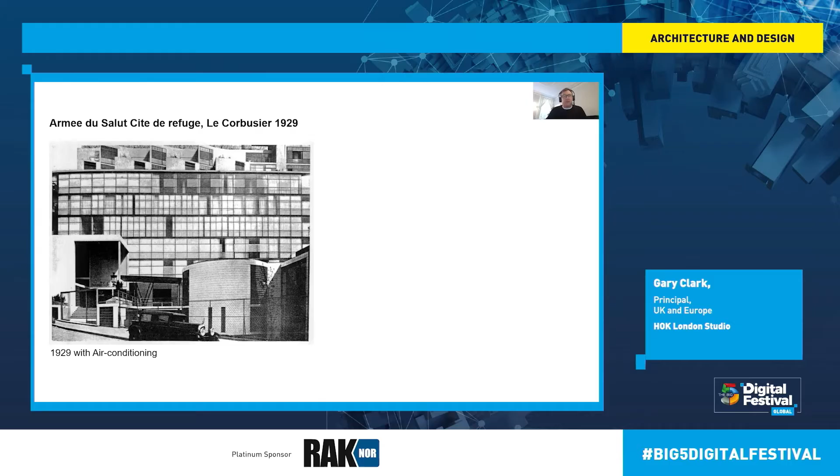of air conditioning. However, over the years, the organization that ran this couldn't afford their heating and cooling bills, like electricity. It was too hot in summer and too cold in winter. And effectively, they had to redo this building. So they invited Corbusier back in 1952 to do a retrofit. This is probably the first sustainable retrofit.

And what he did is he created a naturally ventilated approach, mixed mode. You can see here external shading devices, and again, it was all tuned to the orientation of the building. And this helped the building to mitigate its environmental conditions with a sensible reliance on electricity and air conditioning. So that lesson, I don't think, has actually been learnt by our profession.

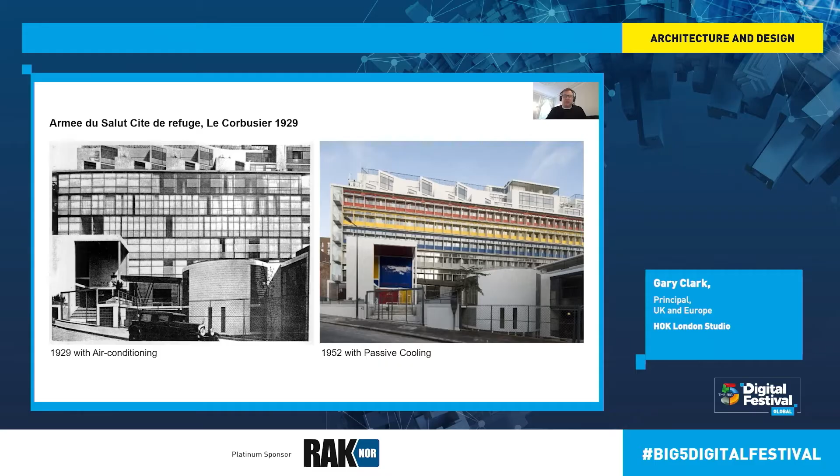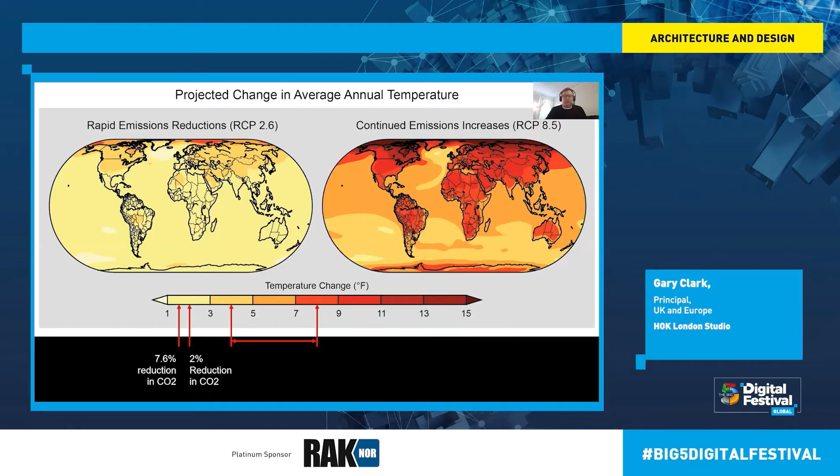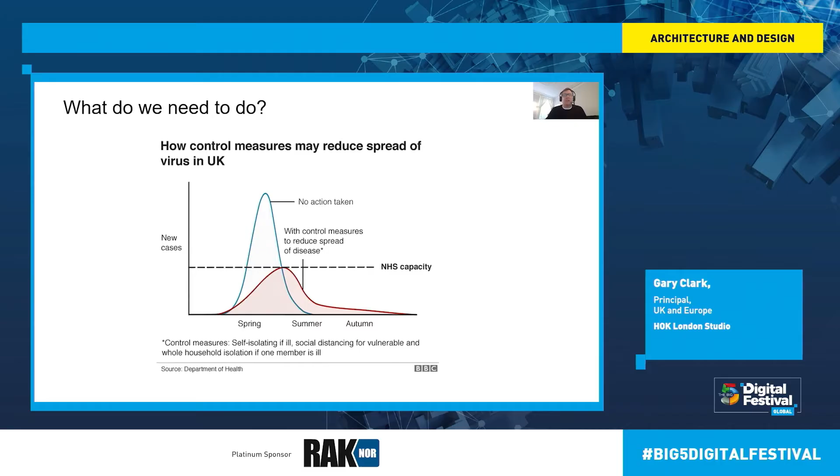And the same principles really match with climate change. If we take no action, then we're going to burst through Earth's capacity, and I would believe that we're actually beyond that now in terms of the cycle. And we've got to work hard to reduce carbon emissions, flatten the curve underneath Earth's capacity to absorb. What we do in the next 10 years is absolutely critical. We can see that in the graph.

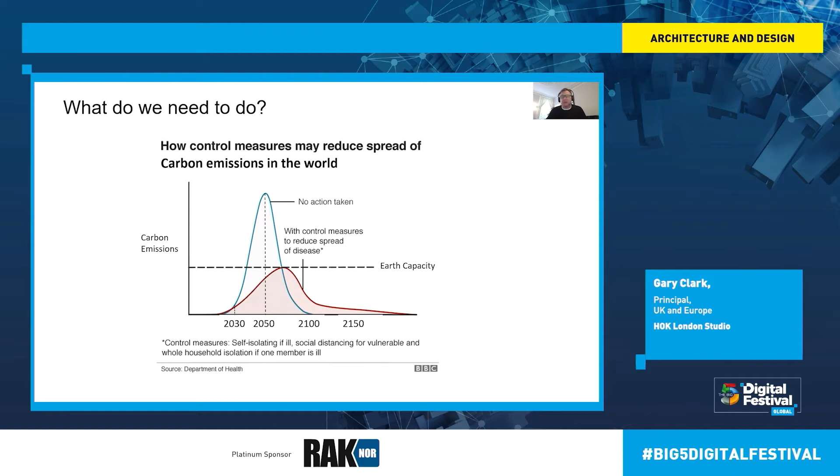I've been very privileged to chair the RIBA Sustainable Futures Group for the last couple of years, and in that time we've rewritten all the core guidance of sustainability for the RIBA. So I'm going to touch on these guides. First one is the RIBA Sustainable Outcomes Guide, then moving into the RIBA 2030 Climate Challenge, and then how that's all embedded into the new Plan of Work 2020.

All the guides link back to the UN Sustainable Development Goals, all 17, but what we focused on is 10 which we think we can measure and manage on site at project level. It's for busy design teams and architects that we need to have ready reckoning metrics to match that, and we can manage that within a project level. These all come down to 8 sustainable outcomes.

So just very quickly, top is operational energy measured in kilowatt hours. Then we've got embodied carbon, which is kilograms CO2, together their whole life carbon. We then look at sustainable water cycle, and that's litres per person per day. Sustainable connectivity and transport, and again, it's reducing the reliance on commuting, and obviously all this remote presentation is actually working well. Then we've got sustainable land use and ecology.

What we ask is design teams in the UK to leave a site with more biodiversity than when they get it, and 10% minimum net gain, if not 20%. Good health and well-being, which we'll touch on in a minute. Sustainable communities and social value, recognizing that what we do has significant value beyond just the bricks and mortar. We've got to think about the wider community benefits. And then finally, we've got to look at the whole sustainable life cycle cost.

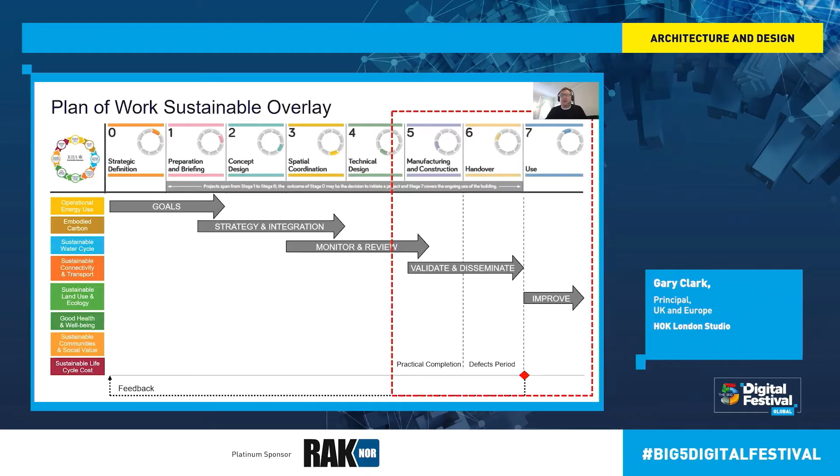So what we're saying is part of this is a graduated post-occupancy evaluation. At the end of 12 months defects, we ask for a light touch review, and that's a walk around and so forth, user survey. If something's not quite right and you think there's further fine tuning, this would be a separate contract. You could go back in at year 2 with your engineers and architects together with the users, and do a little bit more research in terms of what's happening within the building. And then finally, a detailed forensic investigation in year 3. So this is a classic 3-year detailed post-occupancy evaluation. But we've got to close the feedback loop. This is how we've got to do this going forward.

The 2030 challenge has really set a fairly stringent goal. If we do nothing, we can see on the top there, it's going to be +4 degrees. The government in the UK have set a legally binding target of 2050. We can see that on the bottom scale. And then I've been gradually plotting on the different governments and bodies and how they're actually tracking through when they're going to hit net zero.

For the RIBA, we've set 2030 as that target just now, and basically what we're saying is any new building or deep retrofit project has got to be net zero by the end of 2030. If you can go faster, then really encourage everybody to do that.

And the reason for that is we've got to really deal with the elephant in the room, which is the existing building stock. We've got 27 million homes and total 45 million existing buildings in the UK. Most of them are actually underperforming and adding to our 40% of our carbon emissions. So we've got to have a planned retrofit for the entire existing building estate in the UK. And obviously we've got 30 years to do that.

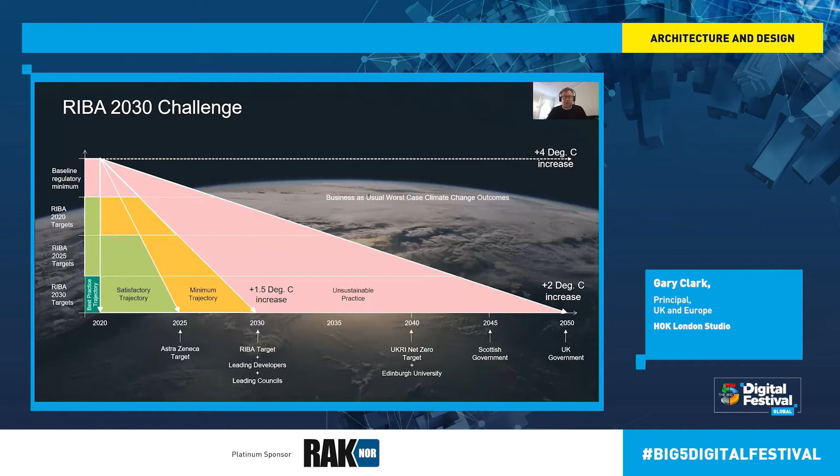So RIBA and lots of leading developers are signing up to this 2030, which is absolutely fantastic. Leading councils as well. Many have declared an emergency and set 2030 as their target. Interestingly, a big global business there, AstraZeneca, has said that they're going to be net zero by 2025 for their entire global operations. And that's the way it's going. So really, if you're at the leading edge of this and you want to be leading in terms of the construction sector, then that's the plan.

Now, if you're in different countries, you can actually use your benchmarks from your own country, and then you just apply that same principle. Now, the principle really is trying to get that 75%. That aligns with the AIA 2030 commitment. And what we're saying really is the challenge is trying to do the bulk of the carbon reduction by the envelope and the building on site itself before you're allowed to offset using decarbonised renewables or planting forests. We think that's kind of a fair balance.

Embodied carbon, slightly different metrics there. We see that's 1,000 kilograms for the average house back in the day, but really new housing is about 600. So we've asked for a 50% reduction on that by 2030. Potable water use in the UK is still an issue, obviously in the south of England, and 125 litres per person is the current benchmark, and we're asking for a 40% reduction. Now that would include rainwater harvesting and reuse, so we'll come back to that in a minute.

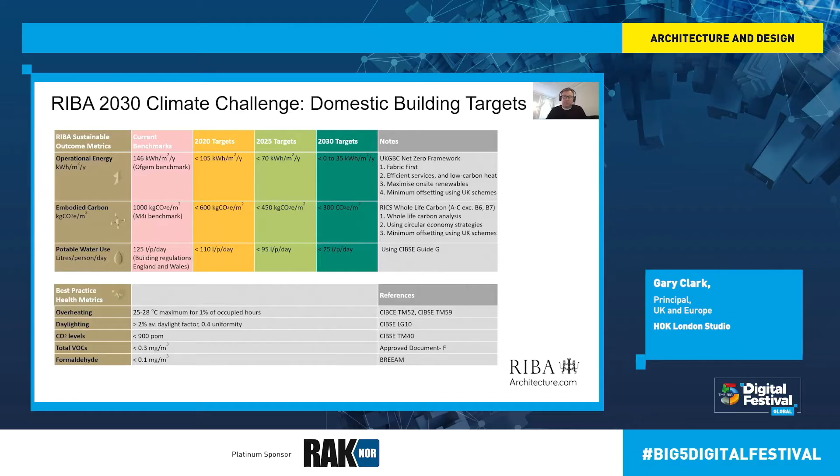And no matter what you do, we've got to hit good health and well-being metrics, and that's indoor air quality, temperature and also daylighting, and that is absolutely critical in a post-COVID world. These are slightly different ones for non-domestic, different benchmarks, but broadly the same principles again in terms of percentage reduction. So the magic number is a DEC rating in the UK, which is a display energy certificate.

It's operational energy, so this is everything in the building, and we're looking at a target of 55 kilowatt hours per square metre, which is really challenging, we know that. Embodied carbon 50% overall. Water use, you can see again 40% reduction, and the health metrics are the same.

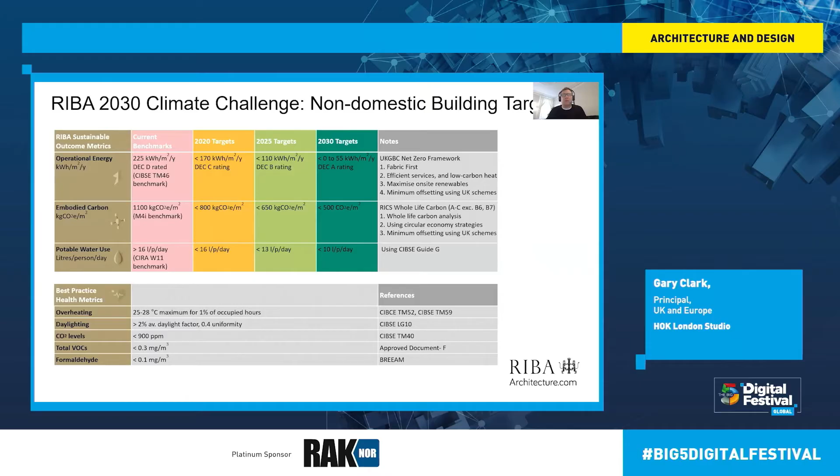So where does that come in terms of current benchmarks? Now this is CIBSE in the UK, kindly gave me this slide, and we see there the blue angled line is really the profile of non-domestic government offices, and we can see some are actually quite low and some are high.

So there's a kind of spread coming from about 100 kilowatt hours up to 400 kilowatt hours per square metre. The average really CIBSE have estimated is 225 kilowatt hours per square metre. That's our benchmark. And we can see coming down there to the right hand side, we've got 2025 targets, which is 50% reduction, and then the 75% in terms of 2030. And we align with LETI and UKGBC as well.

So the red line at the bottom, that 55 kilowatt hours is our target in the UK. That target obviously will be different in different countries, but that's really where we need to be. And there's one building that has actually hit that consistently in terms of it's close to it, but if it had a heat pump, then it would consistently hit that. So we'll come on to that in a minute.

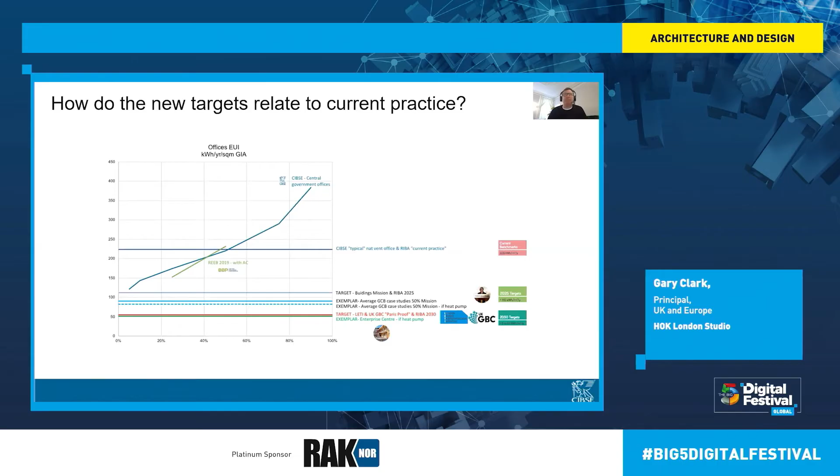So picking up the different key metrics or key outcomes. Net zero operational carbon: there's no shortage of energy hitting the planet. The sun provides 1 kilowatt per square metre for half the planet a day. The problem is trying to capture it and store it. So what we do in terms of the principles is first thing is we've got to retrofit first. So in the UK, we've got to look at our existing building stock, and we've got to do that before we actually build new buildings.

First principle, really after that, if you've got to build new, is a fabric first approach. And what I mean is really looking to really increase the U values, air tightness and so forth of the fabric of the building. That's where the bulk of the savings will come from. Then when you do that, then you think about regenerative engineering in terms of thermal recovery, ground source heat pumps or air source heat pumps, and then smart controls in terms of shutting off when nobody's in the building or in the room and so forth.

Then we're looking about how we integrate on-site renewables. PV obviously is an obvious choice there, and then before you then offset with off-site renewables to achieve your net zero.

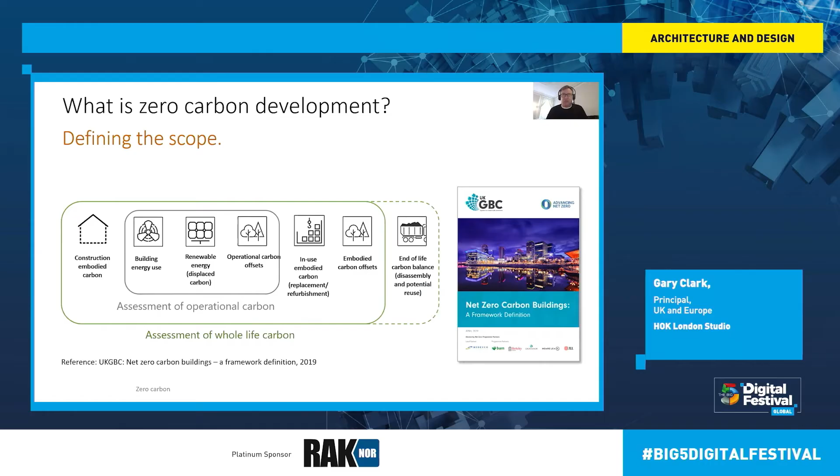So all our targets and all the guides link together with the UKGBC and LETI. We work closely in the background to make sure that we align in terms of definitions, metrics and targets. So just absolutely clear about definitions. This is the definition we're using from the UKGBC for net zero carbon. It's about the operational carbon in the grey in the middle. It's building energy use minus renewables, and you've got to offset. And then the whole life carbon is adding construction and the in-use embodied carbon of replacement and maintenance. And that's where you get the whole life building carbon.

Breaking that down, we can see the splits in the UK. On one side, we can see how it's all related in terms of embodied carbon. To the left side, the majority of that is in the sub and superstructure. So structural engineers are absolutely critical to achieve this. And on the other side, we can see the range of in-use operational breakdown. Heating and cooling is one of the key ones, especially in the domestic situation in the UK. But the unregulated energy use is absolutely critical. You can see there 45%, and that's for an average office. That is where the future really needs to look at reducing that down.

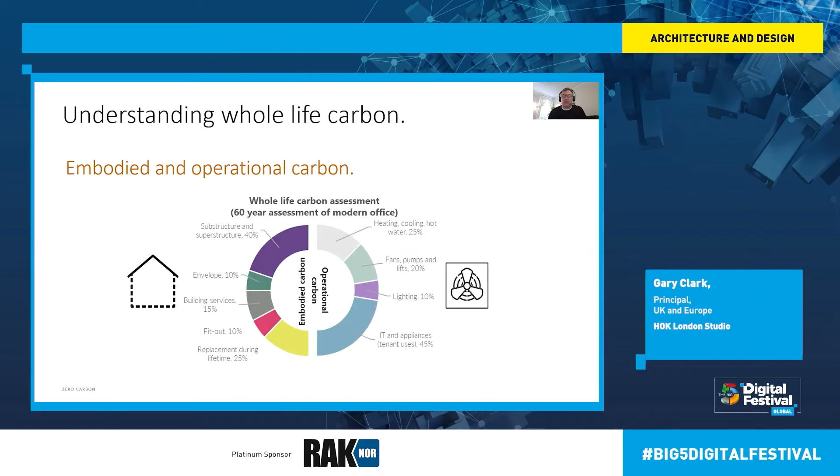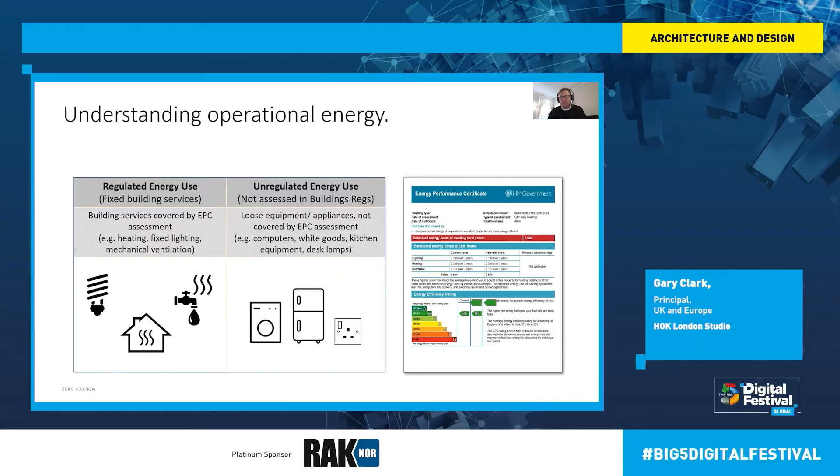Going into the split there, we can see regulated and unregulated energy use. What we're saying in the UK is to ditch our current energy performance certificate, we can see on the right there, and we need to move to a display energy certificate, which includes regulated and unregulated energy use in buildings. There's a few tools that we can use to do that, ranging from poor accuracy to good accuracy. And what we're advising, lobbying for, is to ditch the current regulations and move to a design for performance tool, and we see there Passive House is that borderline. Passive House is one method where we can do an alternate route, with a very good track record of achieving those targets.

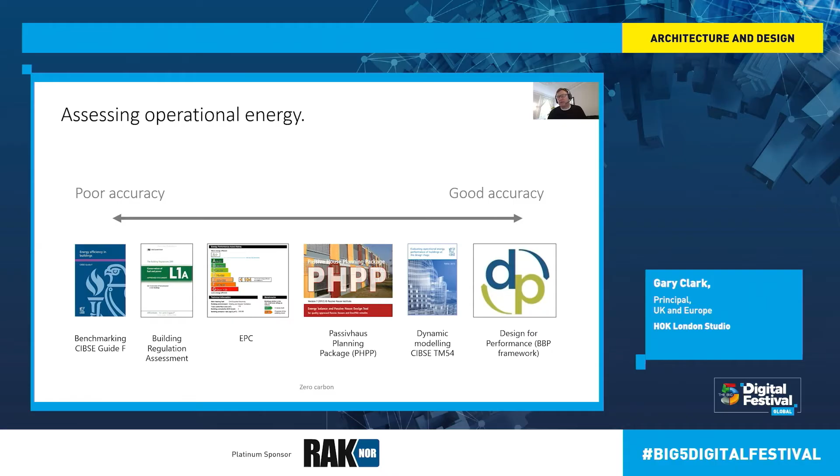Going into non-domestic buildings, we've got the CIBSE TM54 tool, which is really good, and then coming out of Australia, there's a new design for performance tool, which the Better Buildings Partnership are developing, and they use the benchmarks to then set that target.

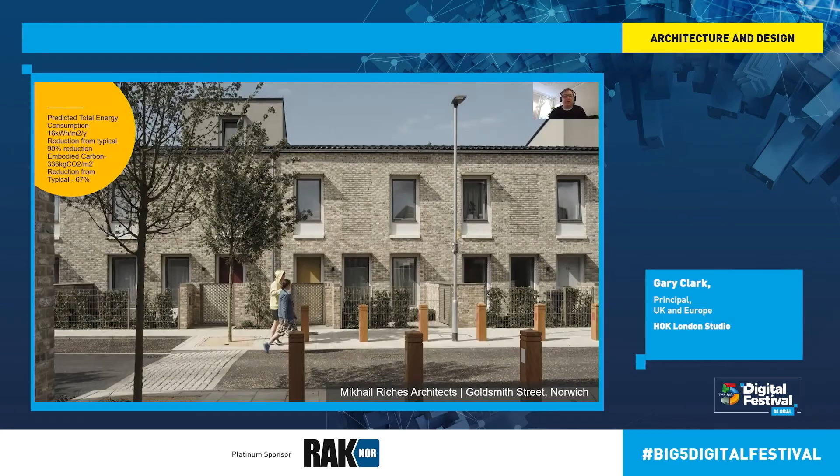This is Mikhail Riches, and I was lucky to be a judge last year on the Stirling Prize, RIBA's premier award, and this was a clear winner. From our perspective, it's a net zero Passivhaus development for about 100, 150 families, and we can see there it's achieved our 2030 challenge right away. So again, it was an obvious and worthy winner of that, and it's changed people's lives as well here. These are communities that have struggled, and the families come in here and they've been lifted out of fuel poverty at the same time.

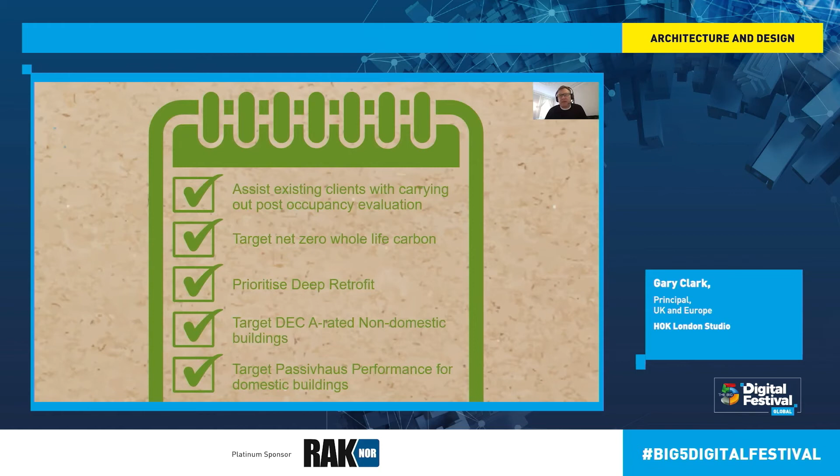So just a few takeaways from this talk. First one is assist your existing building clients to carry out post-occupancy evaluation. Up to 20% energy saving could be made by that if we go back in. And not only that, it's actually a good business relationship as well. We're going to target net zero whole life carbon, and we're going to prioritize deep retrofit before you think about new buildings. If you're going to build new, then you target a DEC A rating for non-domestic buildings in the UK, or its equivalent throughout the world, and target Passivhaus performance for domestic buildings. Finally, we've got to think about targeting that 40% reduction or higher. And again, rainwater is absolutely critical on this one in terms of storage and reuse.

Target health and well-being in terms of the WELL Building Standards, a very good starting point, and that is absolutely critical in this post-COVID world. Then the final two is target significantly enhanced biodiversity. And remember, we're losing 50% of our biodiversity on the planet as we speak. That is the other emergency. We've got to deliver that, and actually, in terms of construction teams and architects, we have got to lead that.

And finally, if you're in the UK or even anywhere in the world, we'd really urge you to sign up to the 2030 Challenge. Thanks very much.

And Gary, thank you so much. Thanks so much for being here and looking at how architecture can actually do its bit to overcome the climate crisis. And I just loved your checklist there with all of the great things that are being done, that have to be done, and that we all need to pay attention to. So Gary, thanks for joining me for this Q&A session.

Thanks very much. Now let's just have a look at the challenge, the RIBA 2030 Challenge. There's a lot in that challenge, and it is 2020, the end of 2020. So you've got to put the skates on and move forward to make sure that everybody comes with you in terms of meeting that challenge. Really getting buildings to net zero.

Okay, I can see in the UK there are millions of homes, millions of buildings, mixed use buildings, all of that. Can it be achieved? And maybe just bring us up to date on what really needs to be escalated to make sure we get there. Yeah, so thanks very much.